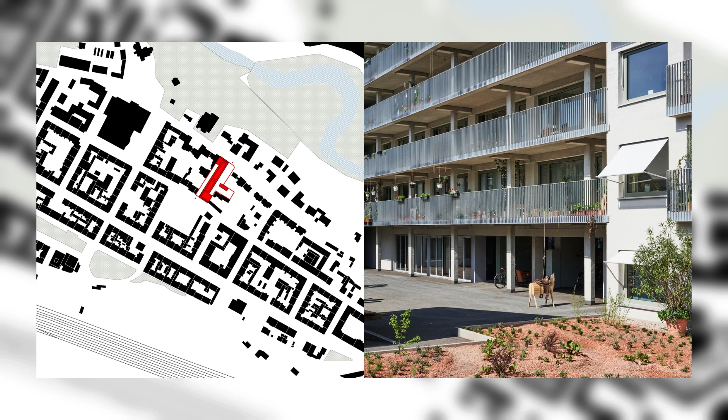The old forge is the only remaining building on the site. The party wall of a neighboring building forms the northwestern boundary. A new development is anticipated along the southeastern border. The after-use of the industrial site gives significant impetus to the urban neighborhood's transformation, and the innovative form of housing lends it model character.

The program was developed in close consultation with the future residents and in a dialogue with the city of Fürth. The building joint venture's aspiration for community-oriented living in diverse and generation-spanning co-housing led to a mix of cooperative and owner-occupied accommodation. A housing cooperative was specially set up in which the owners are sustaining members. Of the 8 sponsored apartments, 4 are available for refugees, and several of the cooperative's apartments are rented by the Lebenshilfe Fürth e.V. charity. The PEN Club offers another apartment to exiled writers.

A neighborhood center sponsored by the city serves as a hub for neighborhood issues and local initiatives within the building. The Spiegelfabrik development provides a communal residential scheme with a social and environmental focus. It consists of 2 end buildings and a connecting building that is accessed along alternating balconies. The site's special characteristics are exploited to set the proposed uses in a spatial context with open spaces. These include different types and sizes of apartments in various locations, communal rooms, a workshop, and a parking deck.

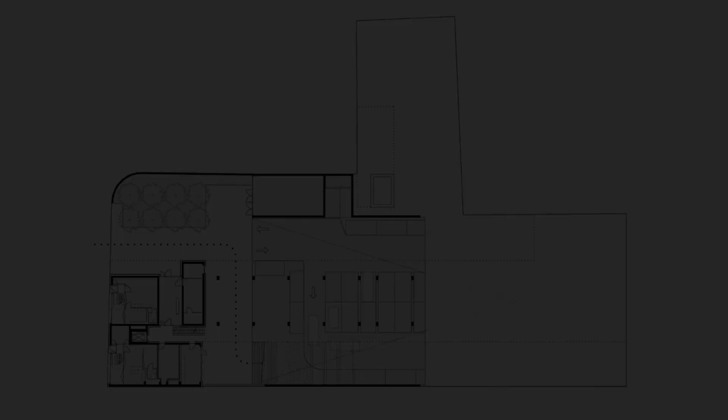A public path leads along the building connecting the 2 streets. The drop in the terrain is negotiated via a broad flight of steps. The maximum utilization of the plot and the resulting density defines 3 high-quality open spaces. They are a courtyard along one of the site boundaries, which is accessed from Lange Straße, a lower courtyard accessed via the public stairs, and a garden at the former forge. The roof contains another communal area that is intended to be used as a garden.

The architectural design at the Spiegelfabrik is reflected in a fine balance between private and public. T-shaped pillars divide the access balconies into an open space immediately outside the apartments and the open corridor, which also serves as a meeting place where neighborly relationships can be forged. In the center of the building and adjacent to the public access is the Spiegelsaal, a communal space with a kitchen, whose entire frontage can be opened up towards the courtyard and garden. The flight of stairs also serves as an informal place to sit, or it can double up as stands. The old forge will accommodate bicycle, pottery, and wood workshops plus a workspace for residents.

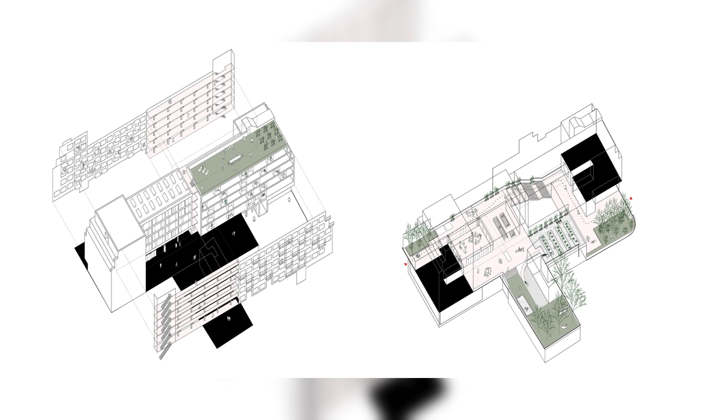Negotiations for the complex space allocation program as well as the layout and fittings for the apartments were accomplished with a robust and efficient basic structure, borrowed from industrial architecture. A frame of reinforced precast concrete elements was combined with lightweight construction, to allow a flexible arrangement of partition walls in the detailed horizontal and vertical configuration of the apartments. Kitchens and bathrooms were arranged around the vertical shafts to meet individual needs.

Sustainability plays a major role in the design, construction, and operation of the Spiegelfabrik building, and also in neighborly living. The building is a hybrid construction with 80% of its external walls made from prefabricated timber panels. The aim was to use mostly durable materials that are environmentally and health compatible. Bespoke construction elements were used on the timber glass facades and the pivoting windows. A good standard of insulation and modern building services achieved high energy efficiency.

A gas-fired condensing boiler and its own gas-fired cogeneration plant deliver heat and power to the building. Photovoltaics contribute to reaching 60% self-sufficiency in power supply. A car-sharing scheme reduces the number of required car parking spaces. Intensive and extensive green roofs and gardens help prevent overheating in summer and provide a pleasant microclimate. The open spaces serve as rainwater buffers during rainstorms and create valuable habitats.